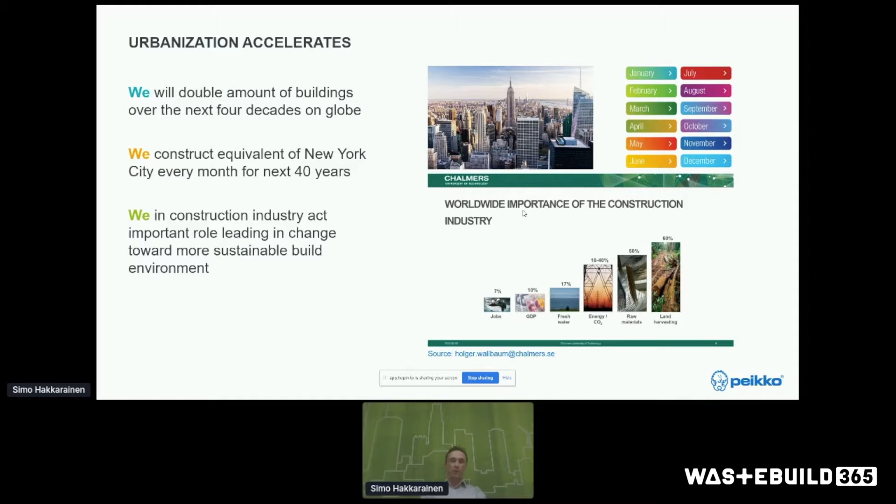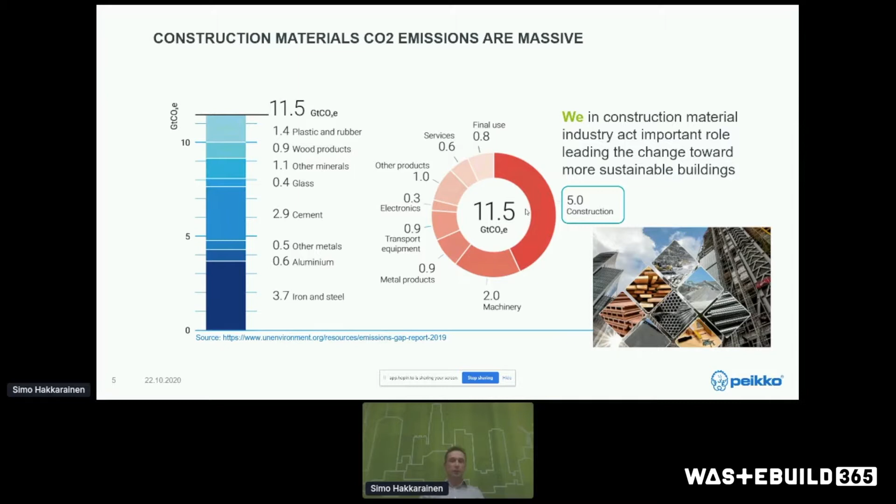In construction materials and solutions business, where Peikko mainly operates, the CO2 emissions are massive. All materials have their own challenges we need to tackle together. That's why we in the construction material industry also play an important role leading the change toward more sustainable buildings in this environment. Here are some figures from a UN emissions report from 2019 — I can't recall the exact figures, but the amounts are huge, so we can make a big impact.

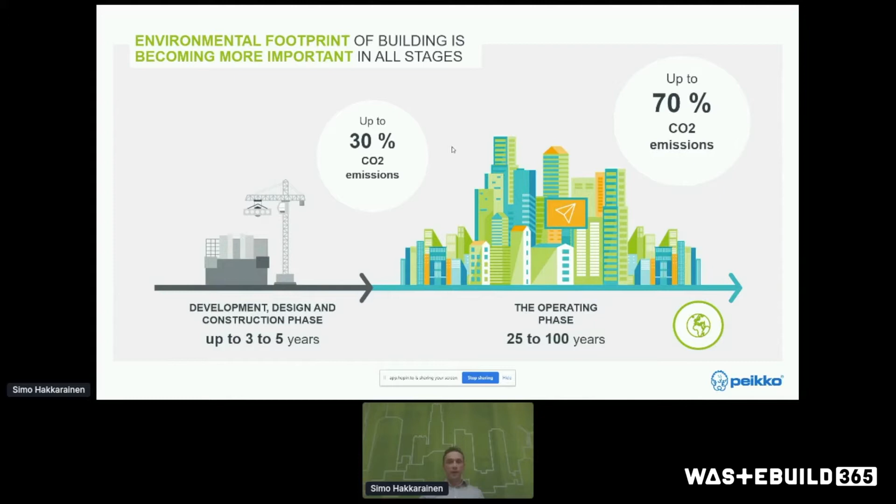We need to look more closely at the construction process itself. As Fraser mentioned, there is a development, design and construction phase, as well as the operation phase. All these phases need actions toward reducing CO2 emissions. It's estimated that 30% of emissions are generated during the construction phase, largely from the materials we use, and 70% from how the building is operated. But we need to put attention on all of these.

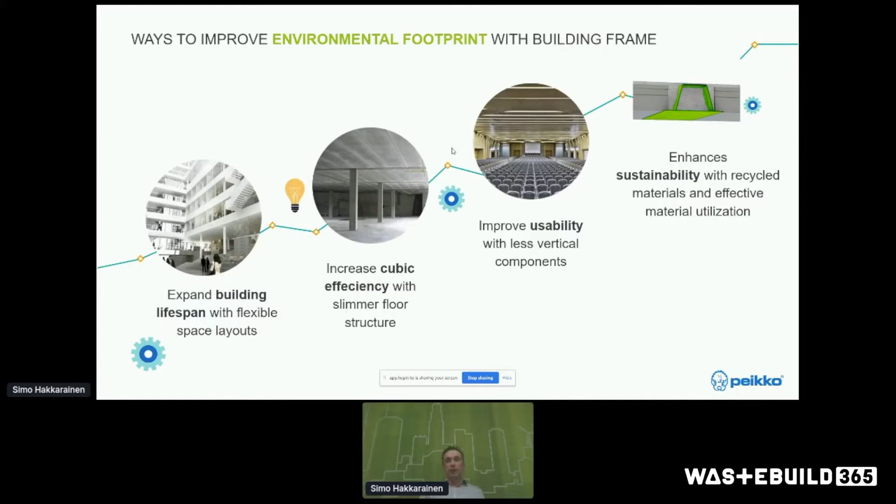We are doing mainly frames and floors inside Peikko, so that's why we need to look upon that. What are the main ways to lighten the environmental footprint of a building through the frame? We can expand the building lifespan with flexible space layouts. We can increase cubic efficiency with slimmer floor structures, so we're not using space just for structures but more effectively. We can also improve usability with fewer vertical components like columns and walls. Finally, what I'm mainly talking about today is enhancing sustainability with recycled materials and effective material utilization, which also has one of the greatest impacts in the construction phase.

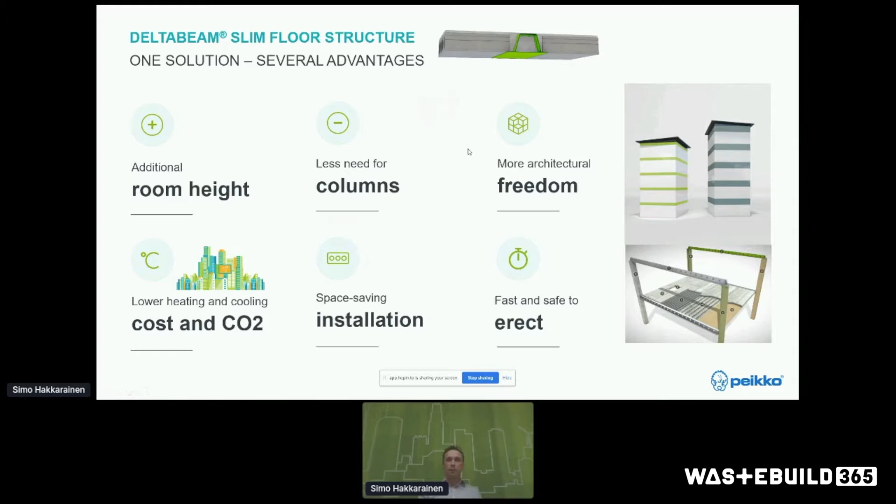But that was not enough for Peikko. We wanted to steer our actions more towards circular economy, also from the material and product point of view. That's why we generated the DELTABEAM Green concept, which I will present today. Our aim was ambitious: to reduce CO2 emissions significantly during the construction phase materials, and eventually have the materials come back into this circular economy value chain to end up producing new beams.

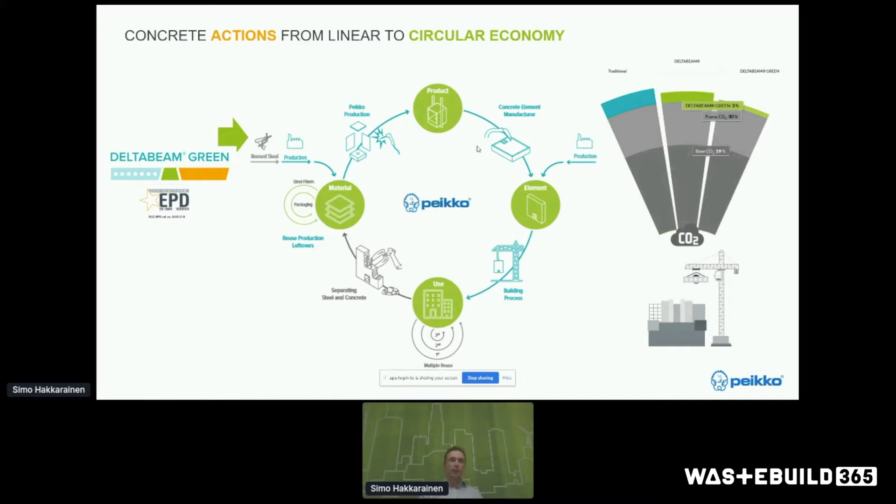So what does it mean in practice? In DELTABEAM Green, we aimed higher in the waste hierarchy. We started to use more than 90% recycled steel in all of our beams, so the material being used is recycled.

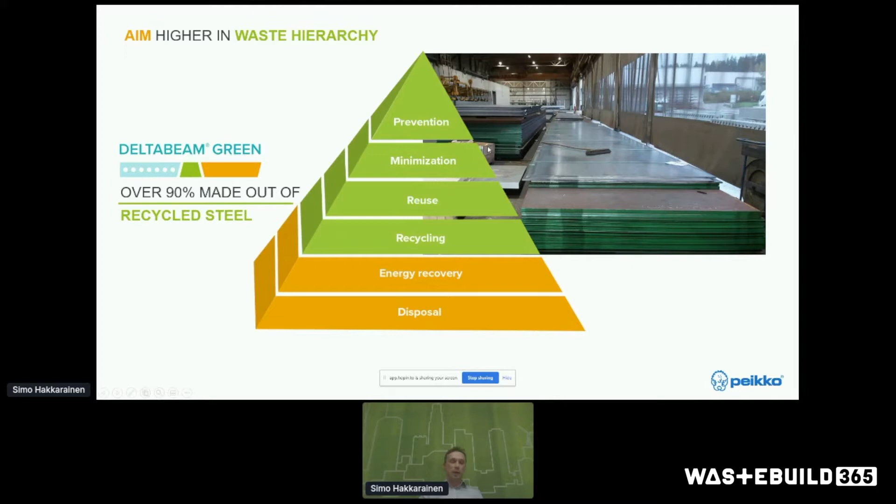It's using less virgin steel material compared to traditional solutions like traditional DELTABEAM. In addition, prevention and reuse is a big part, and this is not only concentrated on DELTABEAM Green, but also in our production we are putting a lot of attention on cutting the scrap.

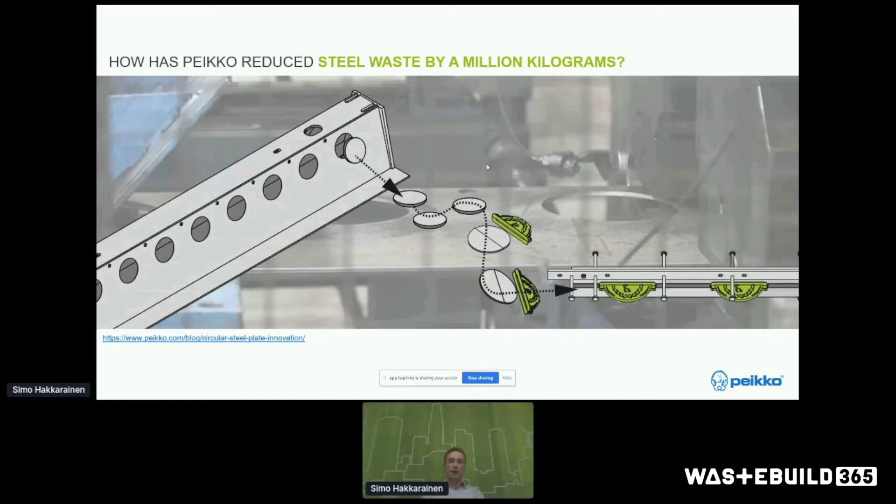In delta beams we can reduce the waste by utilizing it. For example, many times customers are asking where these web holes end up, and we are using them in the floor joint. So this kind of effective material utilization near the value chain is important.

In Delta Beam Green, we are also using biodiesel in our logistics, so that makes a big impact, a big reduction in the CO2 emission about the logistics. It's not only the production, but it's also how we deliver goods to our customer sites. That's what we are doing with our partners in logistics.

In addition, we have been changing our production energy sourcing, so that we are using only renewable energy for producing Delta Beam Green. And in addition, as mentioned, Peikko is also part of this

windmill foundations, and there is also a target for reducing their CO2 emission impact by generating more effective foundation solutions for them. But for Delta Beam Green, we are only using renewable energy for the production, welding, painting, heating, drying, all these processes.

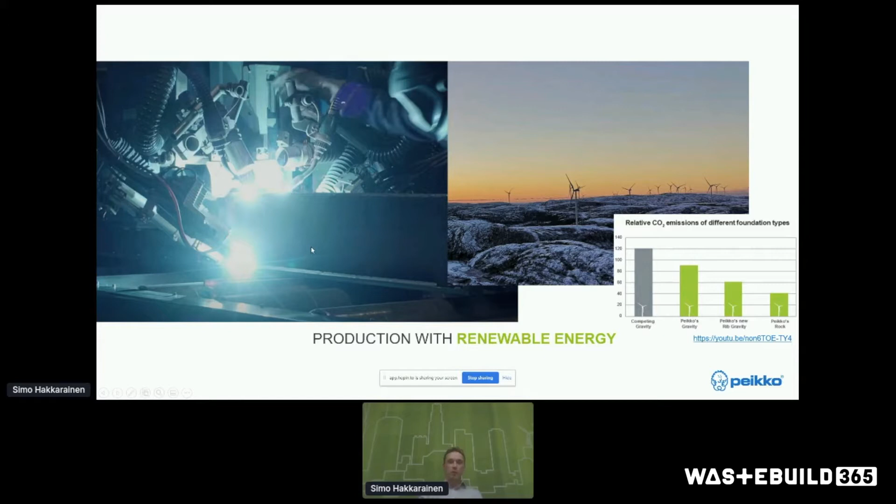In addition to that, all these things we are doing need to be verified and proved, and that's why we have generated for Delta Beam Green an EPD, and it already shows that we can cut almost up to 50% of CO2 emissions compared to other solutions, and that's been verified. This document can be found on our web page, and you can see the exact figures.

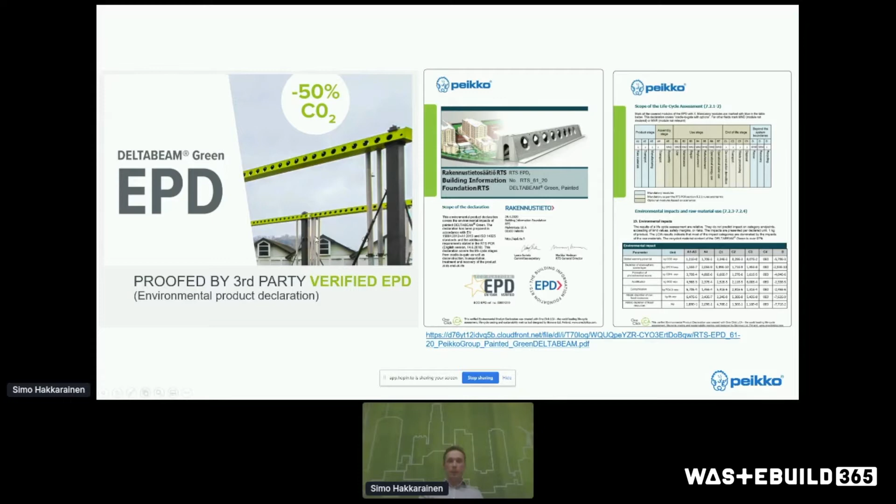Of course, there's always a need for a detailed calculation based on the project, but the figures are available and verified on our web page. Today we will hear more about that in Panu's presentation. And as mentioned, these EPD figures can be used further on in life cycle assessments, generating the full result of the building's environmental footprint.

Panu Pasanen from One Click LCA Bionova will present more about this. We have been cooperating on that side, so it's important to understand details. Of course, other tools exist as well, and that's why Delta Beam Green exists in databases to be utilized in your work.

In addition to that, we know LEED and BREEAM rating. By using Delta Beam Green, we can improve the rating for both of those options and reduce the global warming potential because we are using more effective ways.

We have also generated tools to evaluate, because the floor is where the beams are integrated, and that's the biggest impact we can make. The comparisons, for example, with traditional solutions like WQ beams, pre-stressed concrete beam, or delta beams, and we get figures presenting this 50% cut on CO2 emissions by using Delta Beam Green.

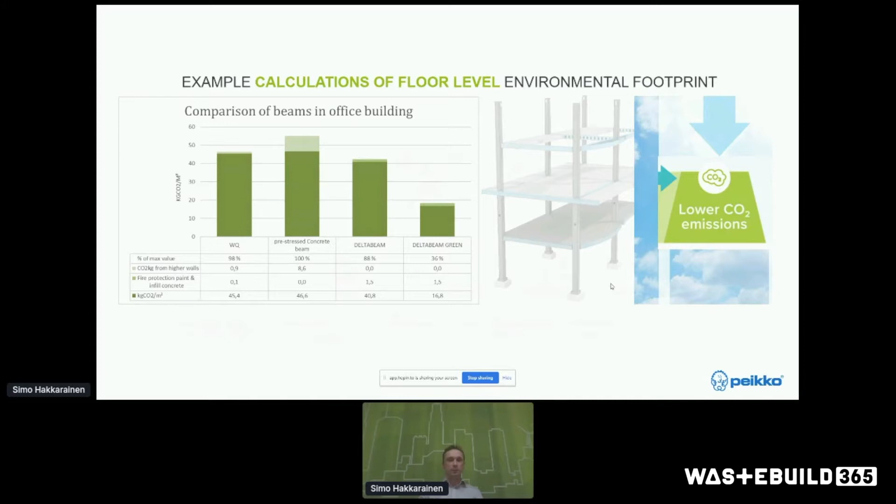That can be achieved by contacting our local sales units in Peikko for your specific project. So here is summarizing the Delta Beam Green offering, the values it should offer for you as customers, and we are more than happy to talk about these things in future talks on stand or later on by your contact.

Concretely, there are already projects ongoing. One in Norway, there is a learning center, and the building is already finalized. They were the first forerunners of using Delta Beam Green, and the target was to have ambitious, environmentally friendly buildings, and Delta Beam Green was part of that solution.

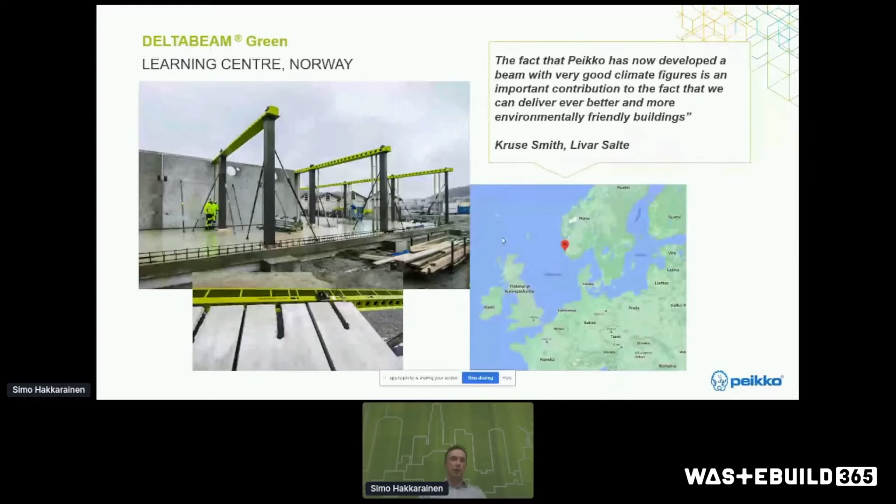Another project is in Finland, a residential project, where hybrid structures with concrete, timber, and delta beam were used together, with also an ambitious reduction in CO2 emissions of the building frame itself. And more to come in the future.

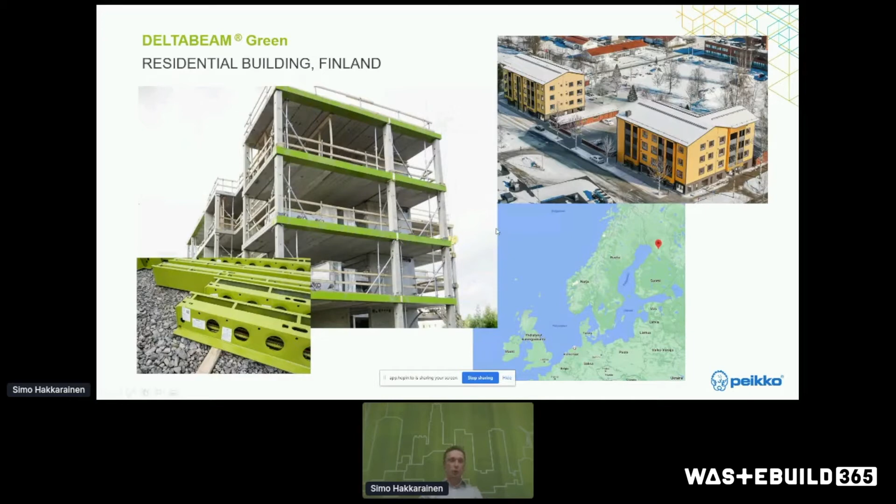So let's generate together faster, safer, and more sustainable buildings, designing and building them with delta beam slim floor structure.

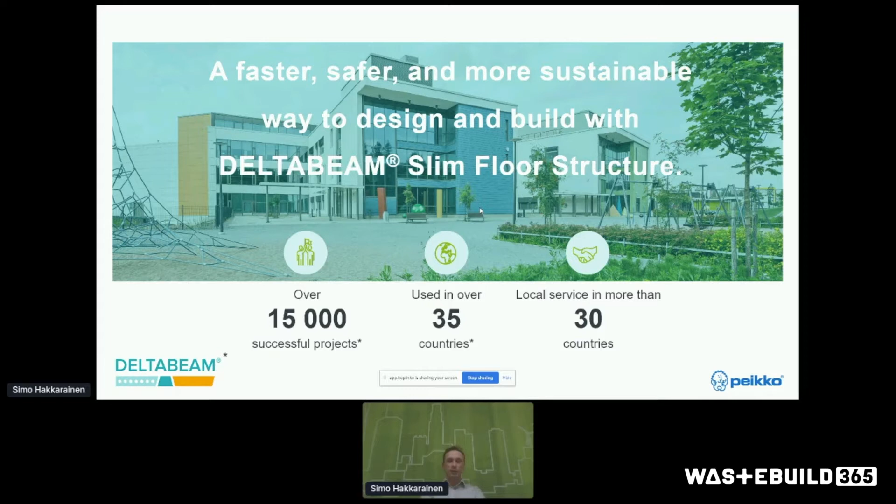Delta Beam itself is already a known system. It's been used in over 15,000 projects in more than 35 countries, and we are hoping that Delta Beam Green will be also part of new successful projects with more attention on environmental impacts in your local countries.

As a summary, let's be part of the answer to climate change, not a problem in the construction industry. For more information, check our virtual stand or our local units in Peikko, you can be in direct contact with me. And now I hand over this next to Panu.

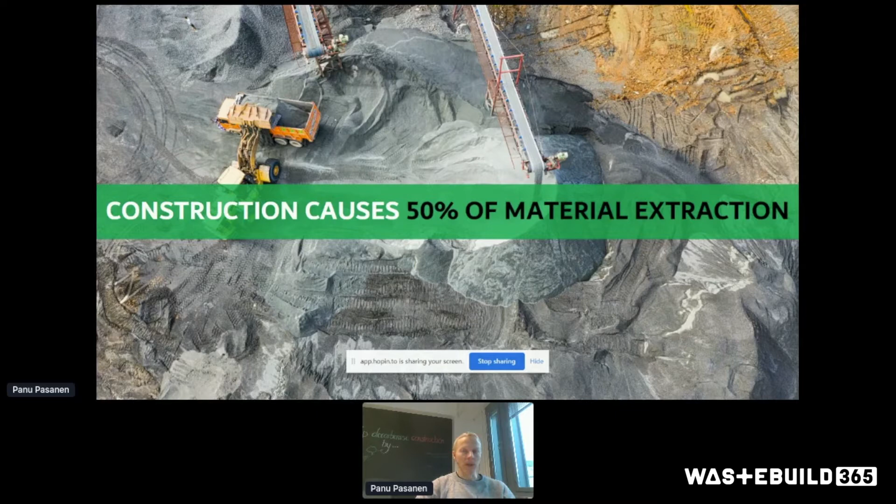Probably well known to you, within Europe, the European Commission has estimated that construction causes about 50% of raw material extraction. So it's a huge quantity of virgin nature that gets blasted away, smashed, and carried to building sites and product factories. What happens after is we keep it in the buildings for some time, and then we put it back to backfill or landfill. Again, we talk about massive figures. Europe is not as big in demolition as some other locations, but the Commission estimates that about 36% of waste volumes come from construction waste.

So this is the problem.

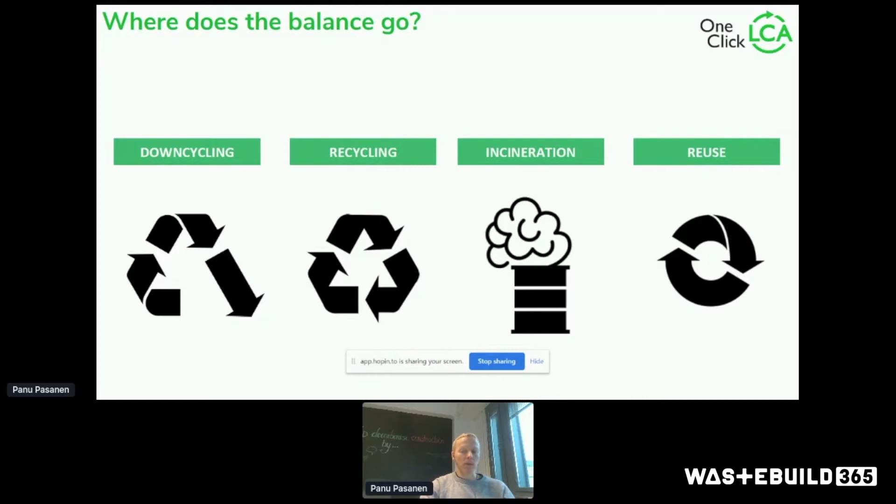The balance goes to some other applications - it can go downcycling, making less valuable products from the raw materials we used initially. We recycle them, especially if it's easily recycled and valuable material like steel or aluminium. We burn it - very easy to do, doesn't matter if it's glued together, if it burns. And occasionally we reuse it. Not all of this is equal value - downcycling loses value, recycling requires remanufacturing, and incineration is obviously a one-way road. So not everything is equally useful for environmental or material value preservation purposes.

That brings us to the problem as a designer, architect, or engineer - how do you compare two options? Let's say one is timber, but you install the timber elements so you can't really reuse them, or you don't assume there will be a market for them. The other would be a steel solution - you'd be able to reuse it, but on the other hand it's not biogenic. So which one is the better option from a circularity point of view? What kind of decisions should you drive? At the macro level it's easy - you want more reused materials - but when you compare design options, you should be able to compare them across the whole panoply of different solutions you could work with.

And we are a software developer, right? There was no good metric on the market - nobody had come up with any measurement that made sense for circularity of a building. So, unusually, we developed our own metric. Nothing fancy about it - it's a material flow based assessment.

We are just looking at the total building mass, and we look at the value preservation at the end and the initial recovered content. In this building, we have 5.2% of the mass recovered one way or another from renewable and recycled sources. Then from the materials returned from the building, much of it is downcycled, some is disposed, and some is recycled.

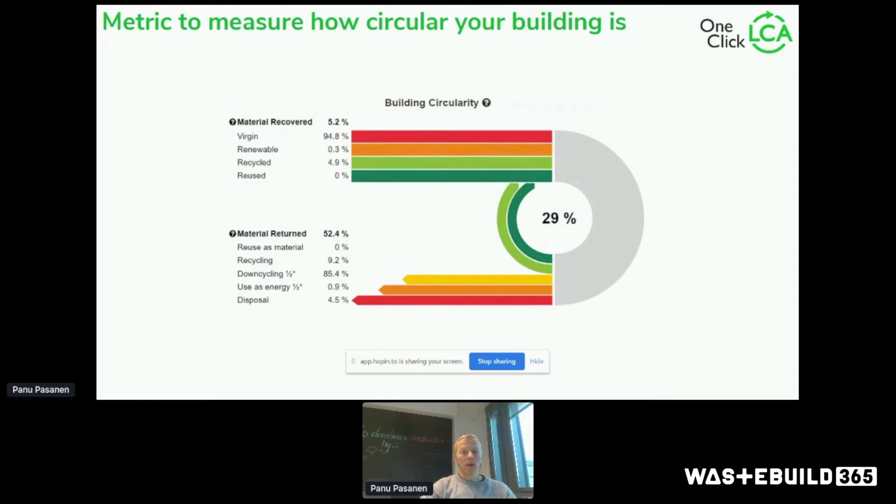What this gives us is basically the ability to compare any two options, literally any two. So you have upsides and downsides between solutions. I think the Delta Beam Green is a great option—it increases the recycled content of the building. But when you use Delta Beam, it's often cast in place, and if you do concrete casting, you're pretty guaranteed to be destroying a lot of concrete.

So you could compare a range of options: a standard solution, cast-in-place building with thick floors, or a more material-efficient one with Delta Beam Green. You could even aim for dismantleable connections together with whatever are the best solutions—Delta Beam is of course a good candidate there. So you could find a range of options and compare them all in a quantifiable manner to identify the optimum solutions from a material preservation point of view.

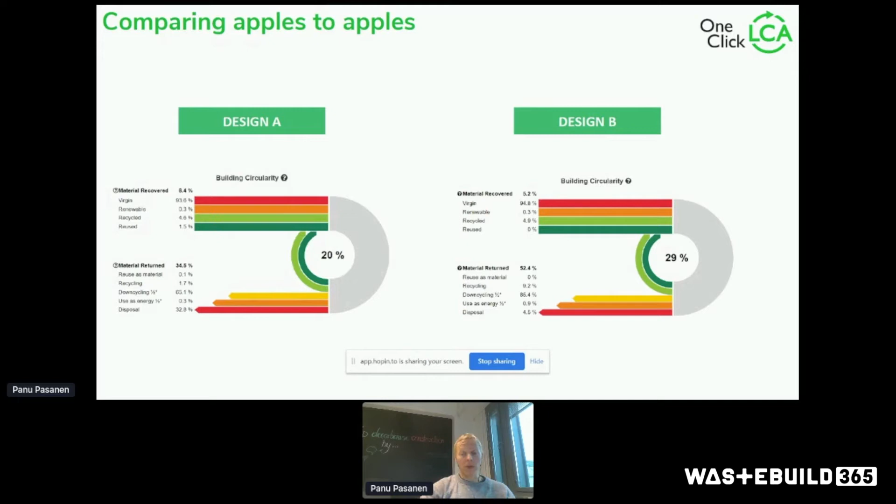Why we have this approach is because, in our opinion, it's not sufficient to look at purchasing. At the same time, you should be looking at how you can design for disassembly and reuse, to create a commercial market and opportunity for reusing whatever you put in the building, leveraging the strengths of the materials. Steel is much easier to disassemble and reuse than other materials classically. With concrete, you need to work a bit harder to develop connections you can undo. And with wood, currently there's an underdeveloped market for reuse, but it's not something you couldn't do.

And the idea would be, crudely put, that you put garbage in and get great products out. So your building product starts with upcycled materials made from something which would be waste or end-of-waste, or a byproduct of another process. You'd be able to retain them in use for as long as possible, so that you'd actually increase the circularity of the whole industrial system, as opposed to just buying the best possible products for yourself.

So we are looking at this whole life cycle, and we think this is a very important approach for a designer.

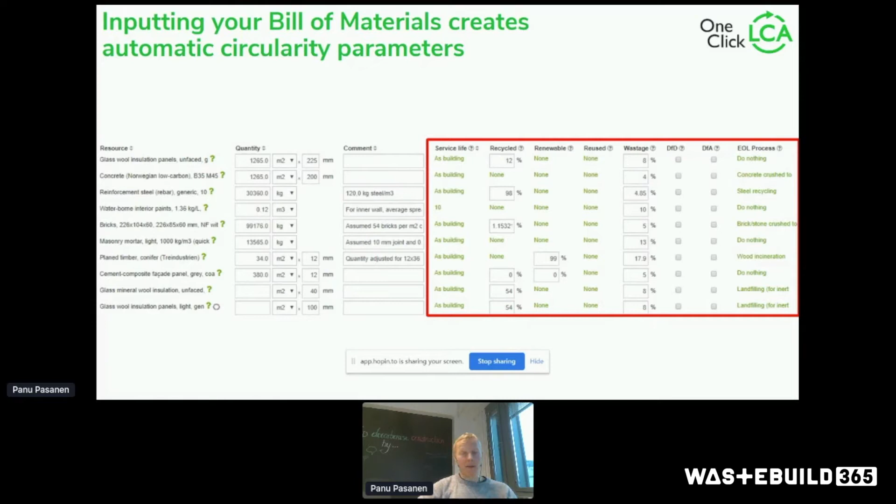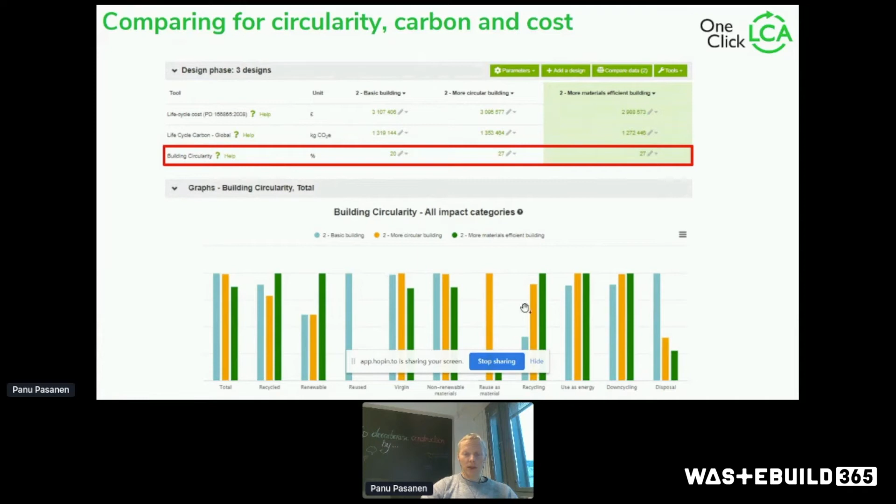Just to give a practical example of what this means, I'm going to share the example of the office where I'm sitting, which is our new headquarters, which we renovated into an old industrial building. I want to share some very simple examples, which I think are good and can be easily adopted when you work with this type of building.

So in our renovation, we had to move a number of walls. If we would have done it the classical way, we would have redone the ceiling, we would have redone the floors for the whole building, or for the whole area we occupy. However, we didn't want to do that, so we just added detailing where we took out walls, which, either you like it or you don't, but it tells you that you have done something on purpose. And of course it saves a huge amount of money and material when you just replace, let's say, 2.5 meters of ceramic tiling as opposed to redoing hundreds of square meters of flooring.

We also had all these storage rooms, but nobody stores anything anymore. We don't have paper anymore in the office, well, to a meaningful extent. So we don't have need of those, right? But we do have need for video conferencing booths and phone call booths. So we created conferencing booths out of all the storage rooms which were there. And again, to distribute daylighting better, we could have knocked down all the walls, but we actually created some internal windows to allow for daylighting.

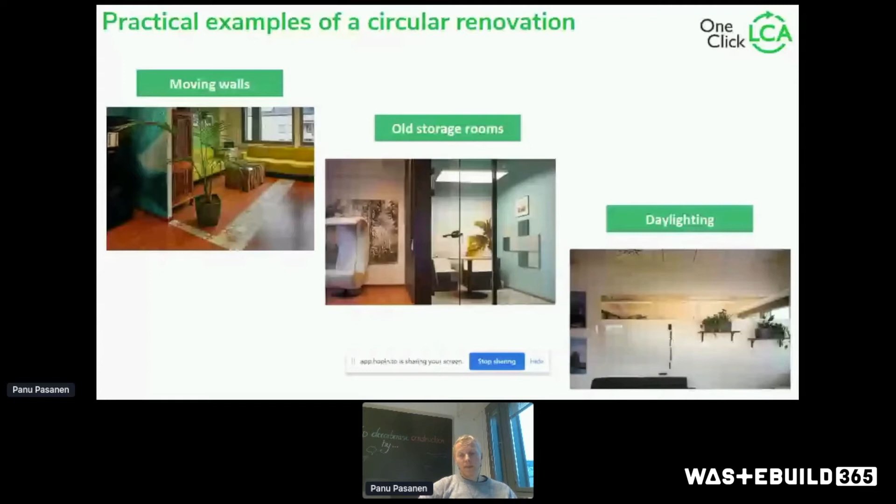And with these, I'm quite proud of the outcomes. So we were able to reduce the renovation carbon footprint by a factor of 6 compared to a standard classical renovation. And we were able to increase the circularity score to 45% versus the initial 28%.

And of course, if we were considering moving to a new building, which would have been an option as well, the saving would have been 30 times in carbon sense.

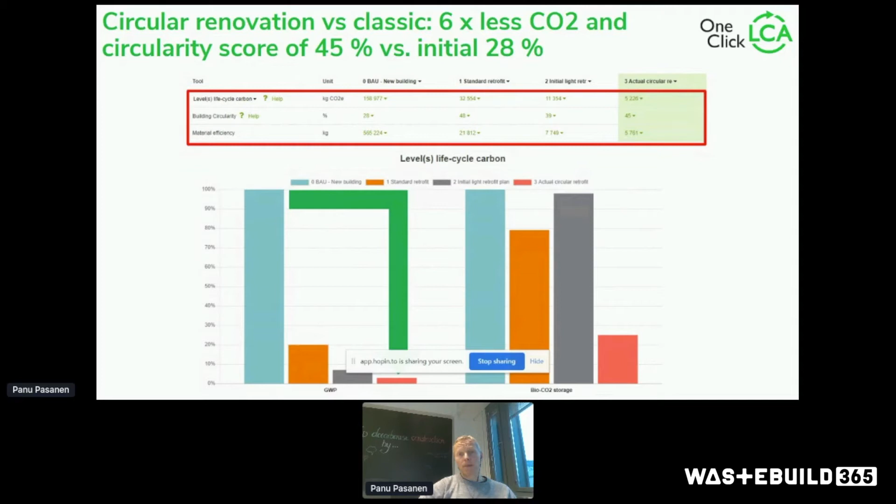So why I'm showing this example, even if it's completely different from the material specification, is that I think it works. It tracks the performance very closely. It's intuitively understandable, and we believe that being understandable makes it quite good. You need to understand what you're calculating to be able to rely on it for your decision making.

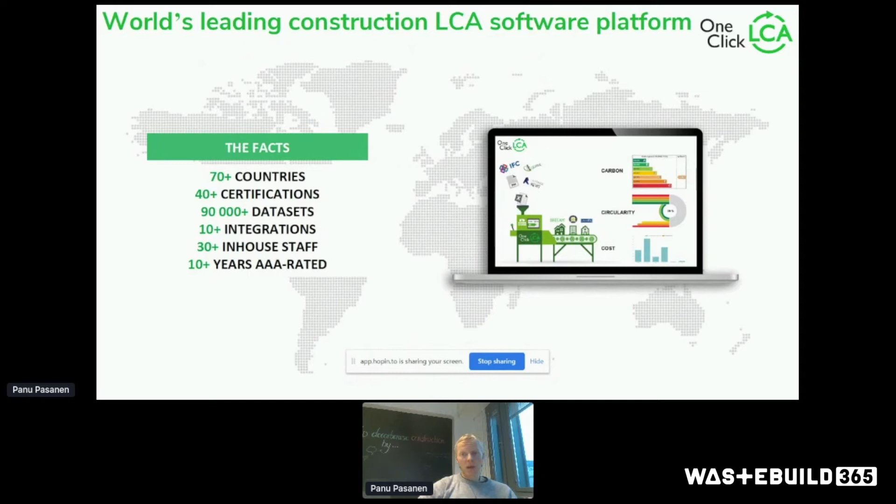We are happy to work with Peikko. We work with others as well. And the key of our business is that we connect you with your supply chain, or we connect you with your customers, so you can share reliable data and generate data for others to use. So when you're an engineer or architect, you can generate drawings, designs, and quantify them, and then give that data to investors or builders. And when you're a manufacturer, you can generate EPDs and give that to architects, engineers, or builders who need it. And we also help a few institutions with their policies and regulations.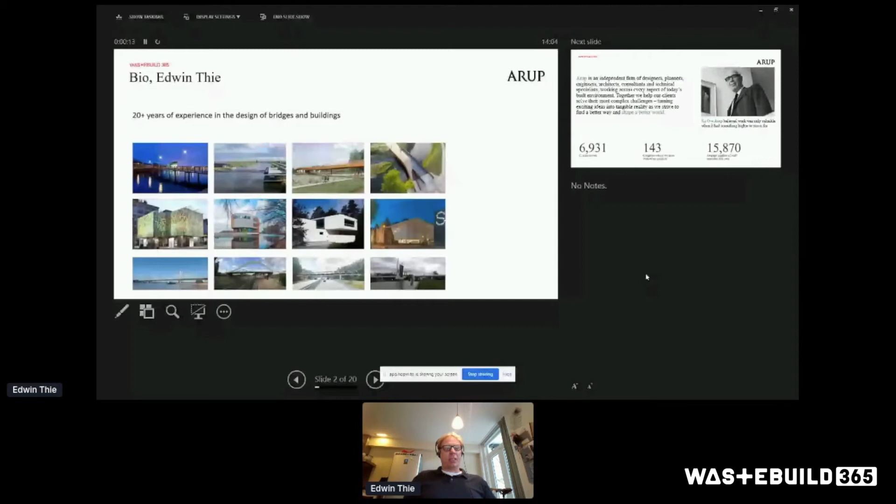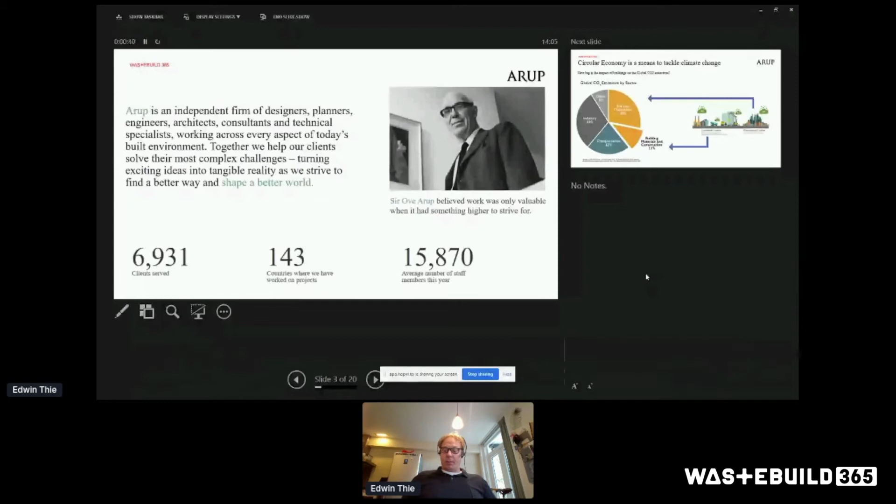Thank you, Fraser. Thank you for inviting me to this year's WasteBuild event, and welcome to all the visitors. I'm Edwin Thie. I'm a structural engineer at Arup, and I have 20+ years of experience in design of bridges and buildings, but mainly I'm a bridge designer, and I've worked for about 15 years now for Arup. Arup is an independent firm of designers and engineers, and we're working across every aspect of today's built environment. Our founder, Sir Ove Arup, believed that work was only valuable when it had something higher to strive for, and that's something that really resonates well with me. We work all across the world, and we have about 16,000 staff members and counting.

So I'm going to very quickly run through how circular economy can tackle climate change. To start with, I'm first going to share a quick overview of what is the actual impact of buildings, and then I'm going to talk a little bit about how circular economy can help to reduce your carbon emissions. So let's quickly start from a macro level.

The share of buildings in the total global CO2 emissions is about 40%. So it's really a large part of the total carbon emissions globally. About 28% was due to building operations, and 11% is due to material production and construction, as mentioned also by the previous presenters.

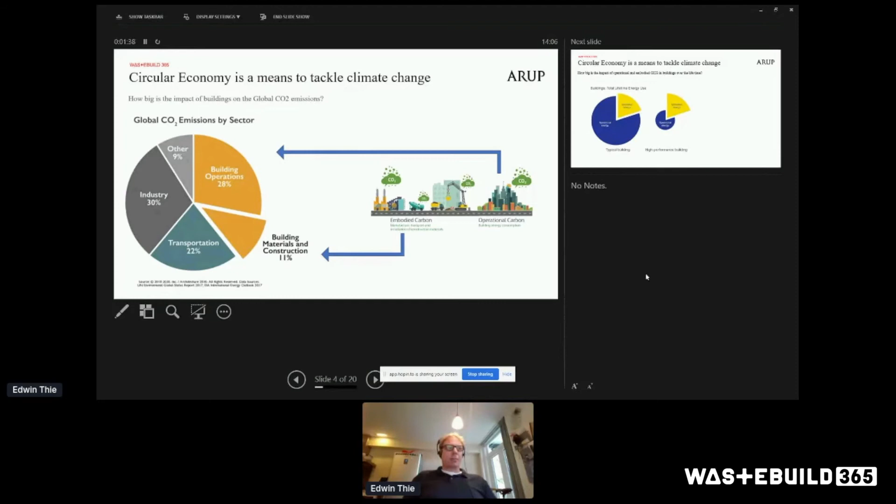When we very quickly look at a typical standard building, you might see over the life cycle 25% of embodied energy compared to 75% of operational energy. But if you look at a high performance building, and that will only improve in the future, then it might already be 50-50, or even the embodied energy could be the larger part of the life cycle carbon emissions.

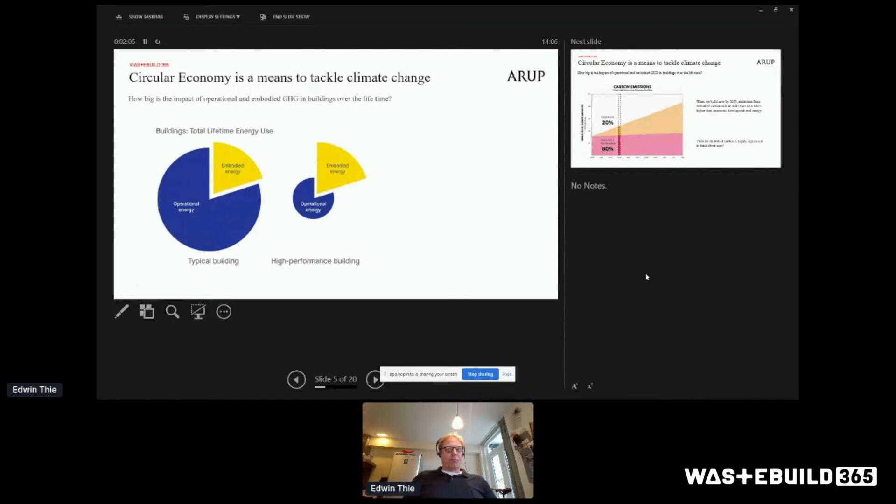If you think about it, if we build a building now, the embodied carbon due to materials and construction is there immediately, while the operational energy will slowly increase over the life cycle of the building. And when we look at 2050 as a target for when Europe wants to be carbon neutral, if we build a building now, 80% of the total carbon emissions is due to embodied carbon and 20% due to operation. So embodied carbon is definitely a significant aspect to think about now if we want to become climate neutral.

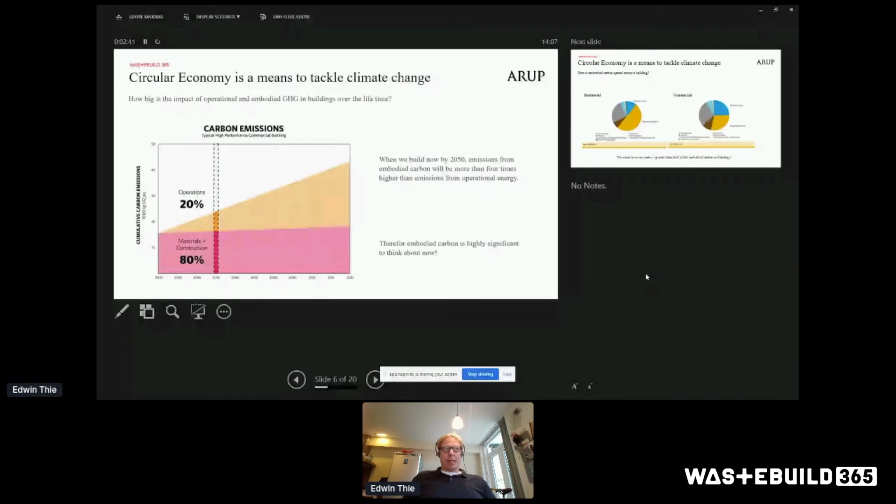If you split it up a bit more into where the embodied carbon sits in a building, some studies done in the Netherlands by Metabolic show that for residential and commercial buildings, the main structure—substructure and superstructure—makes up more than half of the embodied carbon in buildings. That's a really important aspect, and it's also the main area where structural engineers have an influence.

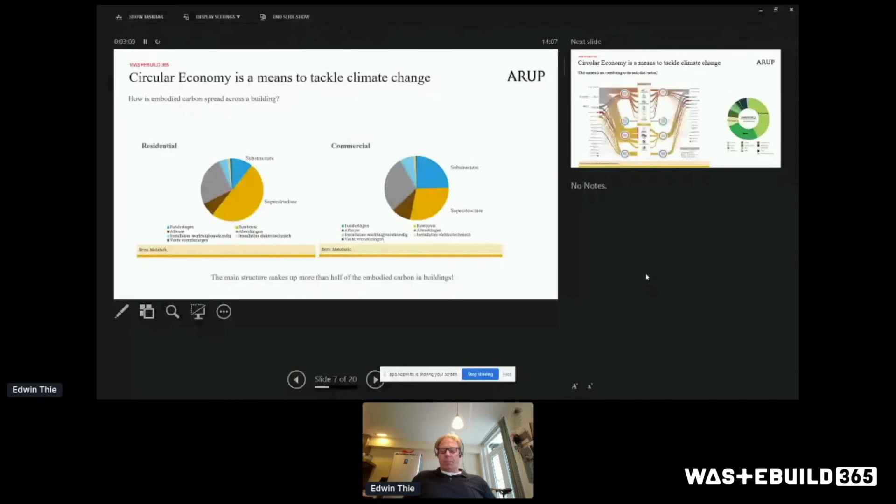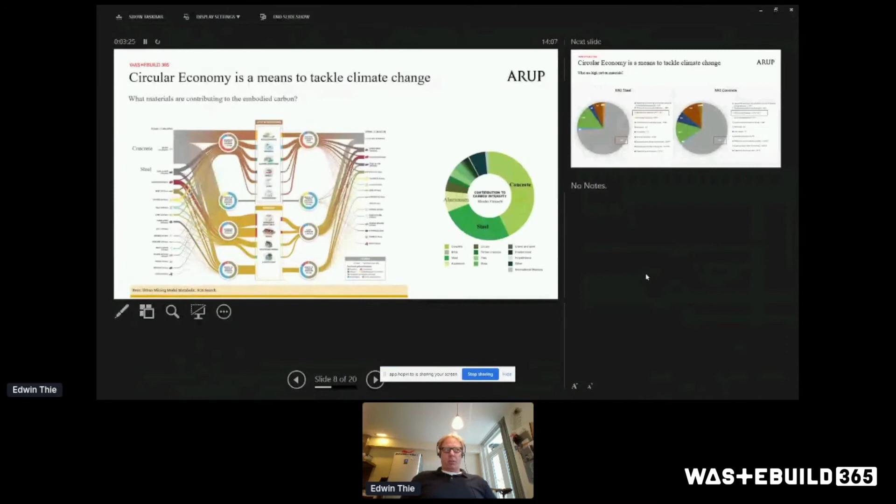More studies on the material flow in the Netherlands by Metabolic and SGS Search show the material flow and what type of materials are the biggest impactors. From that, you can relatively quickly see that concrete and steel are the ones that contribute the most, both in quantity and in carbon emissions, to the total carbon emissions.

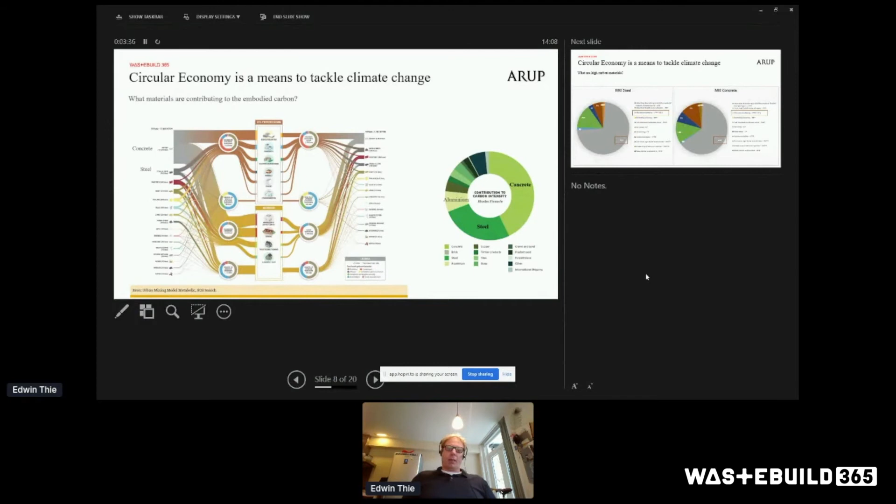So steel and concrete. If we look a bit more into the total environmental categories that have an environmental impact from materials, similar to the tools that Panu described, we see that 65 to 75% of the impact of steel and concrete is shared by global warming potential. That has to do with the carbon emissions related to the production of those materials.

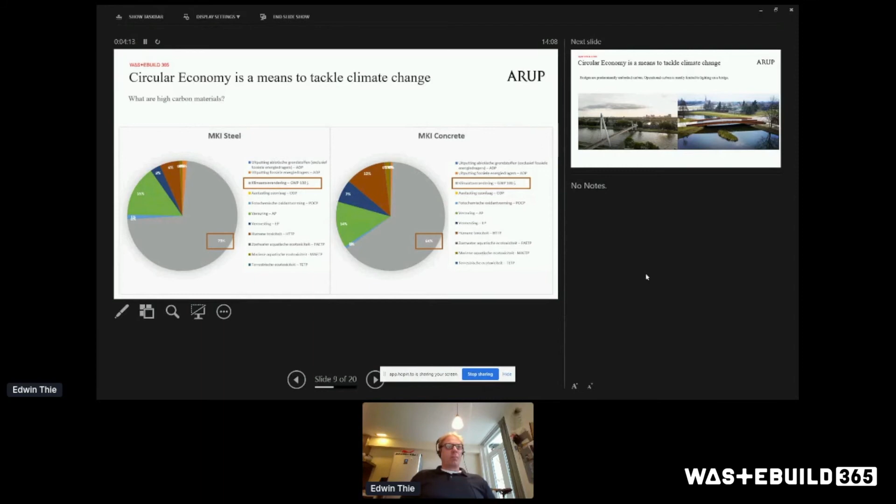As I said before, my main job is a bridge designer. Differently to buildings, bridges generally don't really have a lot of operational energy. It's predominantly embodied carbon due to the materials. Operational carbon would most likely be limited to lighting on a bridge.

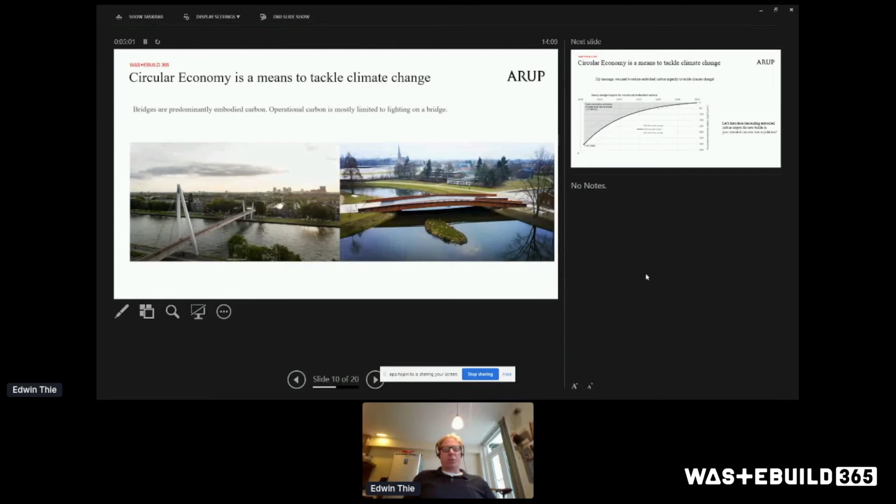Also within bridges, there are mainly two elements, two materials, as I mentioned before. Steel and concrete are used in 95 to 99% of all bridges. Therefore, we are now being commissioned by the Dutch Highways Agency to do a feasibility study looking into the use of timber for highway bridges.

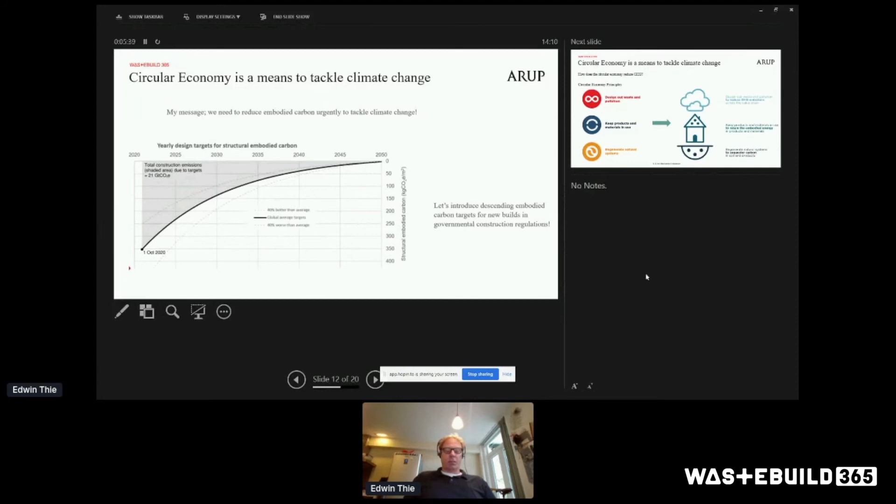My message would be we need to reduce the embodied carbon urgently if we want to tackle climate change. I would be a big fan of stricter legislation that introduces a carbon target for structural embodied carbon, descending to 2050. It's ambitious, but I hope it's something we're slowly moving towards with the new Green Deal. It's quite positive, the ambitions of the Europe region.

So what's the impact, or what can circular economy do about this? Circular economy is based on three principles: first, design out waste and pollution; second, keep products and materials in use; and third, regenerate natural systems. All three principles have their impact on reduction of greenhouse gases.

Designing out waste and pollution reduces carbon emissions mainly at the start of a building, so the embodied carbon. Keeping products and materials in use retains the embodied carbon, and regenerating natural systems captures carbon out of the air and stores it in the soil or in products. So circular economy is a really good tool, a means to tackle climate change.

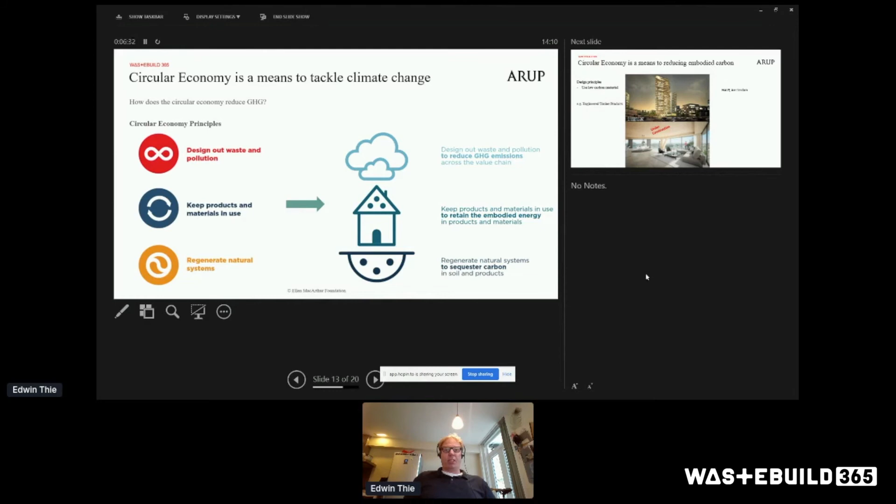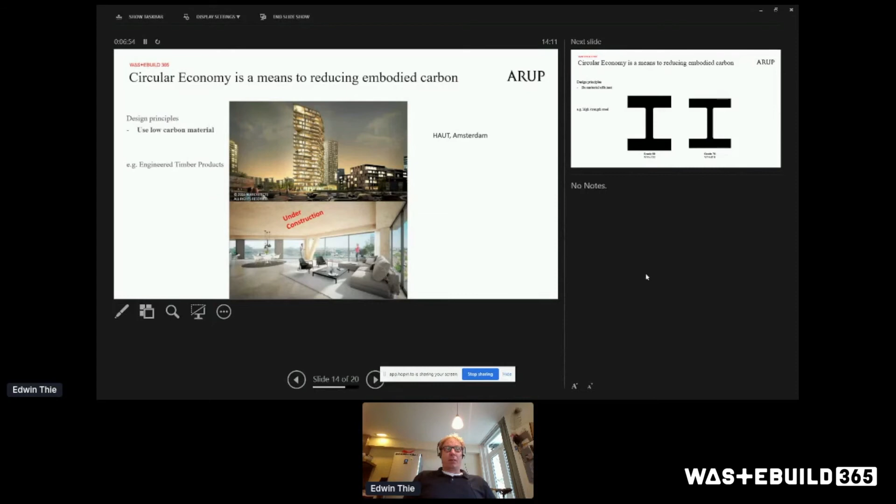As a designer, you want to translate that into design principles for when you're designing a building. One would be to use low carbon materials, like we're doing at the moment for a 37-meter, or 73-meter high residential tower in Amsterdam, which is mainly made out of timber. Only the lift shafts are made out of concrete.

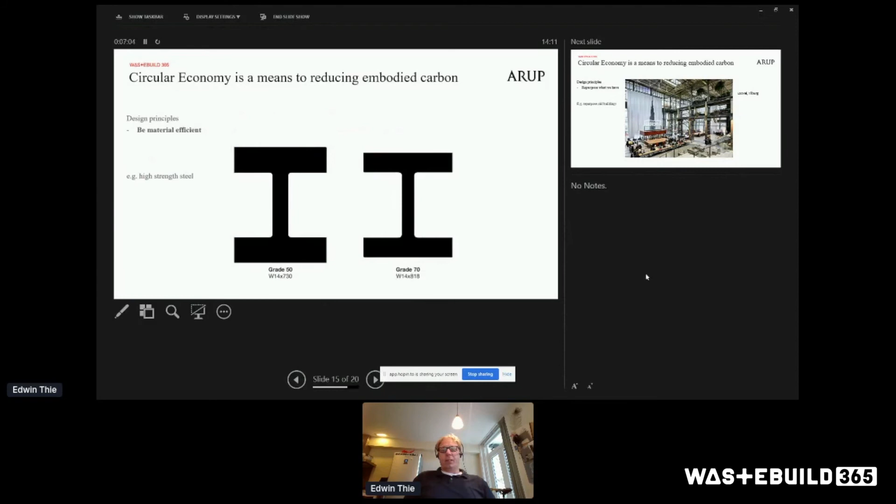Another good design principle, already mentioned by previous speakers, is to be material efficient. For example, we can use high strength steel compared to normal strength steel, which can reduce the amount of steel that you need.

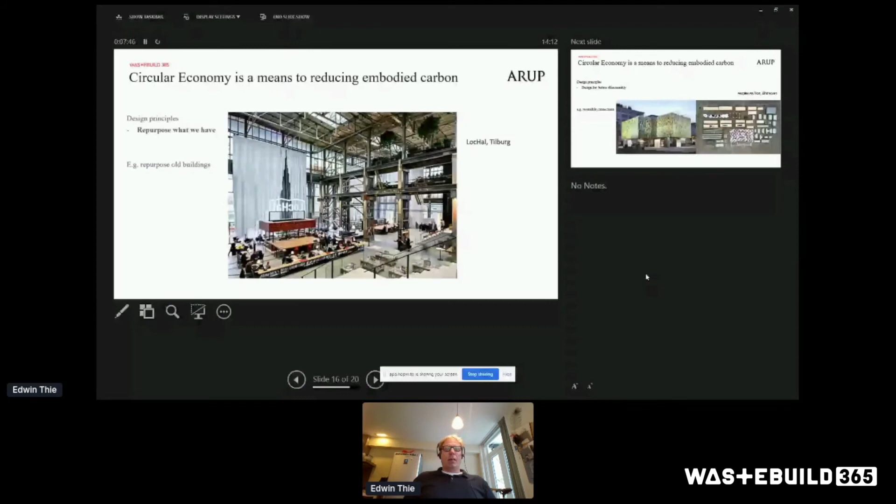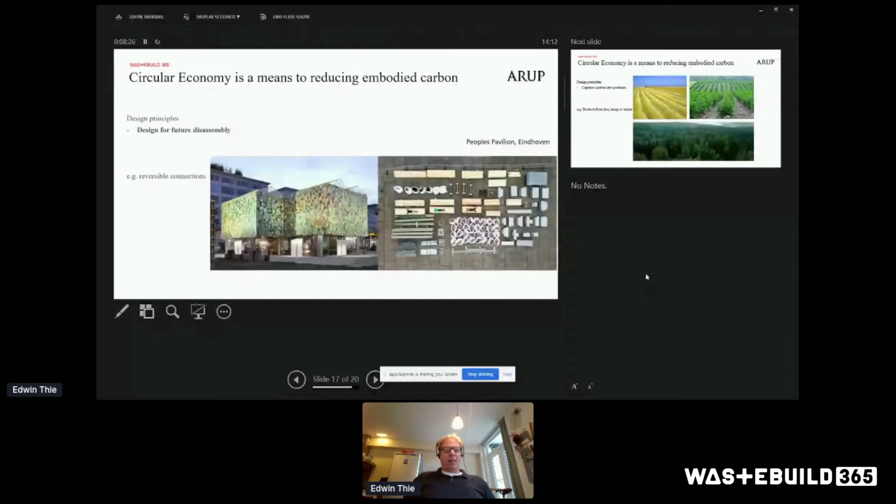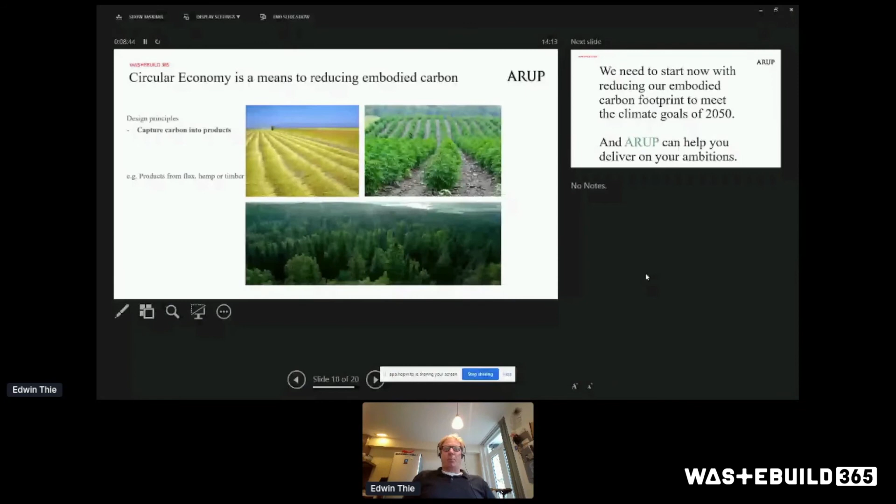Another really good one is to capture carbon into products—capture carbon out of the air into biomass, which we can then use to make products from, for example, flax, hemp, or as mentioned previously, timber. So we really need to start now reducing our embodied carbon footprint if we want to meet the climate goals of 2050. And ARUP can, of course, help you deliver on your ambitions.

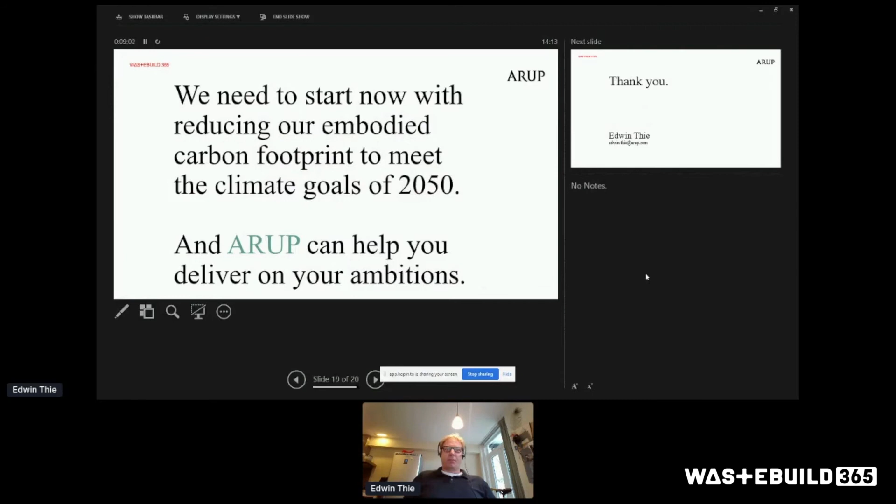Thank you very much. If you have any questions or anything else, you can always contact me at this email address, and I'm happy to talk to you about that.